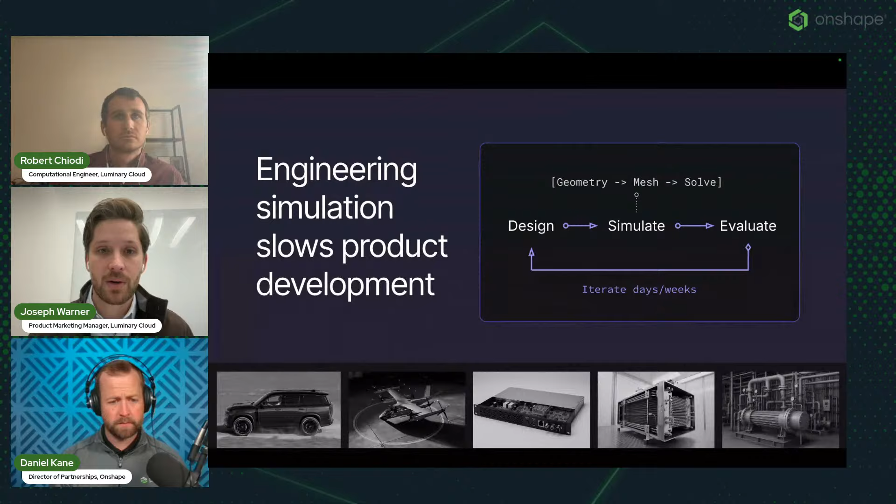What we're seeing across industries right now is that physics AI is actually reshaping this process. We can take a design, and with the physics AI model, we predict in seconds, or sometimes less than a second, the actual full simulation results with high accuracy. We'll get into the details a bit more, but the important thing here is that we actually can remove these manual, time-consuming steps. You don't need to do this typical computational meshing process, which is very manual and iterative and time-consuming. And then when you go to solve, you're not doing traditional numerical solving, which can take hours or longer—you're actually doing inference, so it's very quick, and then very repeatable and robust.

This opens up some really interesting use cases: things like rapid design iteration, which is particularly relevant for people who work in CAD tools, for example working in Onshape—you can actually do inference and very quickly get feedback on your design as you make changes. But of course, also design exploration—we can fire off a number of different inferences across various configurations and evaluate them all at the same time. And then optimization—actually wrapping this process in some sort of optimization algorithm and driving towards some best design automatically. And then finally, digital twins—how do you take these models and use them once the product has been deployed in the field, and use the inference to evaluate performance very quickly and cost-effectively. All of these things are traditionally possible with simulation, but they are really unlocked, and you're able to do them at much greater scale with physics AI.

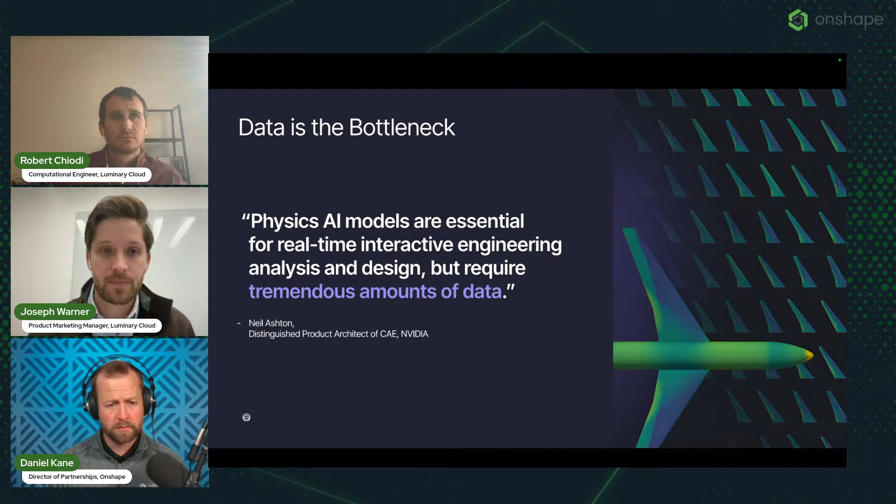What we've built is a unified physics AI platform, from data generation with our GPU native solver, to model training, and then actually deploying inference in your production environment, or you can use our APIs. But we also have access to our pre-trained shift models, and Rob's going to talk about that a bit more.

What these models allow you to do is actually bootstrap your process. You can take a model and fine tune it such that you don't need as much data yourself to get started and get high accuracy results, so that you can use it for engineering grade analysis and design.

And then finally, other data sources. You may have experimental data or test data that you want to bring in and train the model on, and help ground it in the actual reality that you've tested.

To dig into this a bit more, what we have here is what we call our physics AI factory. All of this exists within the Luminary platform, from data generation, geometries, meshing, and our GPU native solvers, which run simulations very quickly and cost effectively.

All this data is fully managed within the platform, along with our shift models. And then you're able to train models all within the platform with a very robust and extensive API SDK.

We also have an MCP server and an AI assistant, so you don't have to be an expert in our SDK to get started. I think Rob's going to talk about that a bit more.

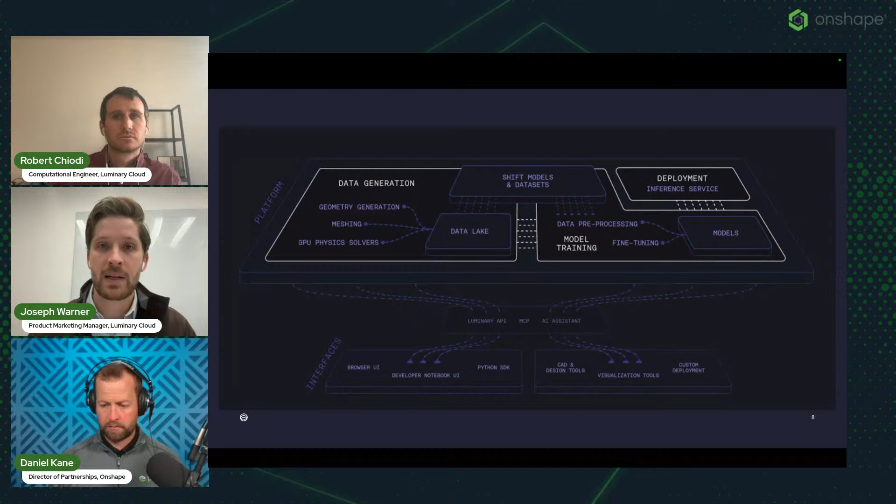You access all these things through our various interfaces, from our browser-based UI to our SDK and our in-app notebook as well. So we make it very accessible, but also extremely powerful, and it's all fully managed so you don't have to go and piece all these things together yourself, because we often hear that customers find it quite challenging to piece all these things together.

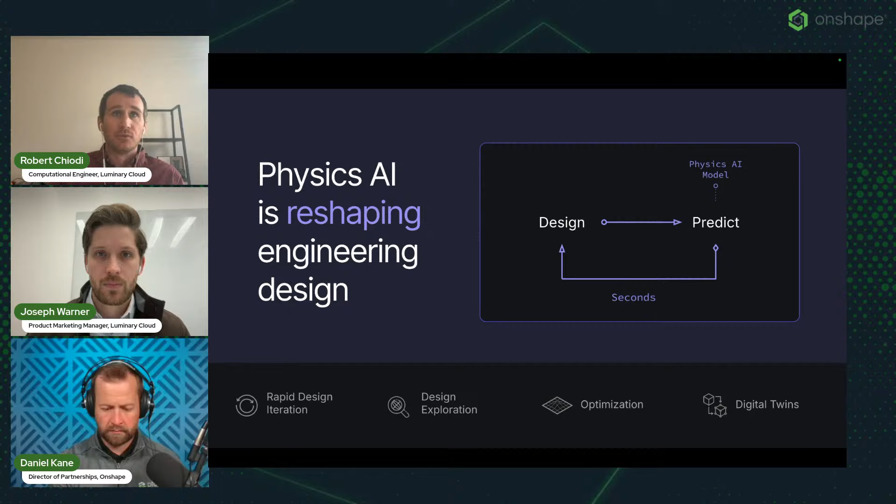This allows you to do things like rapid design iteration, which we'll show a little bit about today, design exploration through having parameterized CAD that Onshape enables, optimization, which we've done before but won't be talking about too much today, but really just enables all these workflows by having this tight coupling, which we built through this integration.

If they allow you to access this website, you're good to go basically from there. And also you ensure seamless, scalable, and accessible workflows. No matter where you are for your entire team, you can collaborate together, even if you live on different continents.

You can quickly share products. You don't need to worry about how to send this file over, zip it and put it in Dropbox or something. Instead, you can just send a link and we're already there. You can share with access controls, all those kinds of things that both Onshape and Luminary enable.

We also have robust and open APIs. This means that if what I showed today in our integration isn't exactly what you need from either the Onshape part or the Luminary part, both of us have very flexible and open APIs that you can use to customize this to your exact workflow and power what's going to help you and your company get your work done.

We also discussed rapid design exploration, made possible by the fact that Onshape is very good at robust CAD generation, especially if you make parameterized CAD through configurations or variable studios. This can, with the integration, be directly imported into Luminary and tracked with version history for design sweeps and optimization at scale. Again, this is made possible by the fact we're both in the cloud.

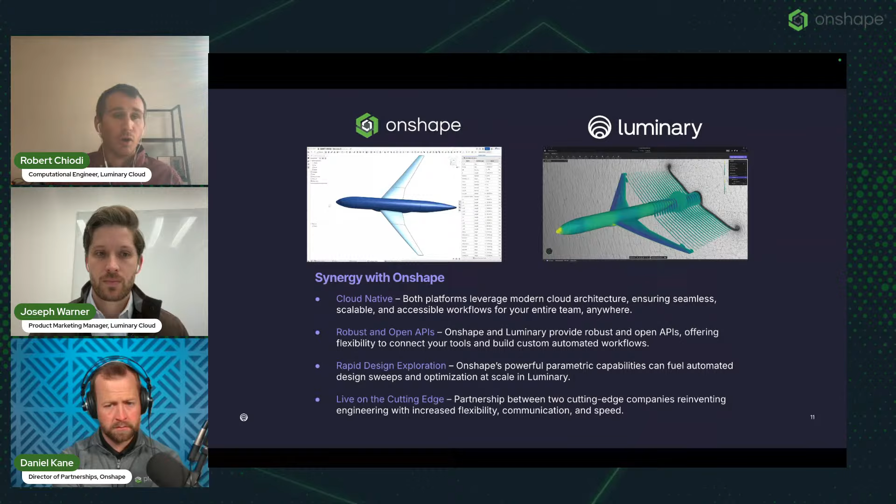Lastly, both of us just live on the cutting edge. So you can be confident that if you're working with Onshape and Luminary, you're going to be at the forefront of what's being done in both the CAD and simulation, CAE, physics AI worlds. You'll know that you'll be well taken care of and won't be falling behind against your competitors.

So now we're just going to show really quickly what the integration does, just the bare bones of it. There's a bit more to it as well, but we're just going to show the key functionalities.

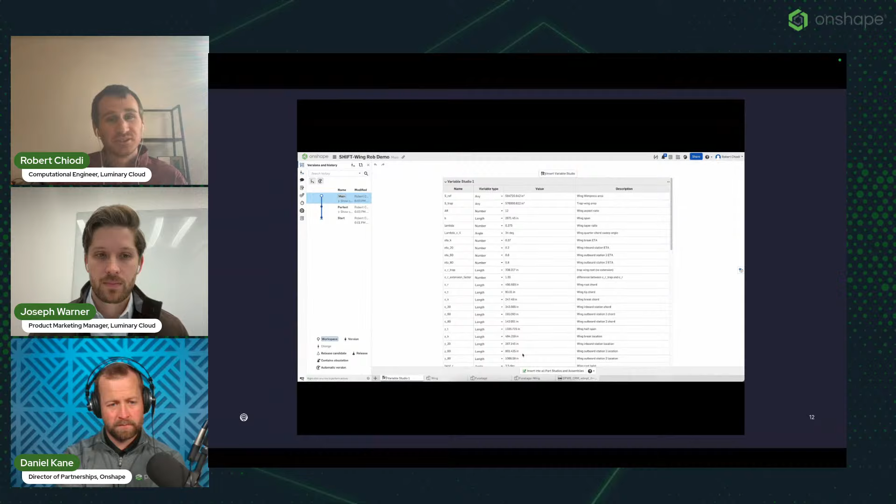Essentially here, we're starting from Onshape. This is the shift wing model that Joe mentioned, which we'll talk more about in a couple minutes. Essentially, it's a parameterized model with quite a few parameters in the variable studio, as you can see. They're actually controlling what the shape of the wings looks like, how they connect to the fuselage, and the shape of the fuselage itself.

Now we'll switch over to Luminary. All you need to do with this integration is go to your settings in Luminary, if you have an active Luminary account, and click Connect Account for Onshape. There we perform an OAuth workflow. We were already signed into Onshape, so that happened very quickly. Otherwise, you just sign into your account.

Now we're just going to start a project in Luminary to track the work we're going to be doing. Now we'll upload a file like you do normally, and you can see there's an Onshape button. What happens is we're pulling and showing all the documents you have in Onshape -- these are just the 8 most recent or so.

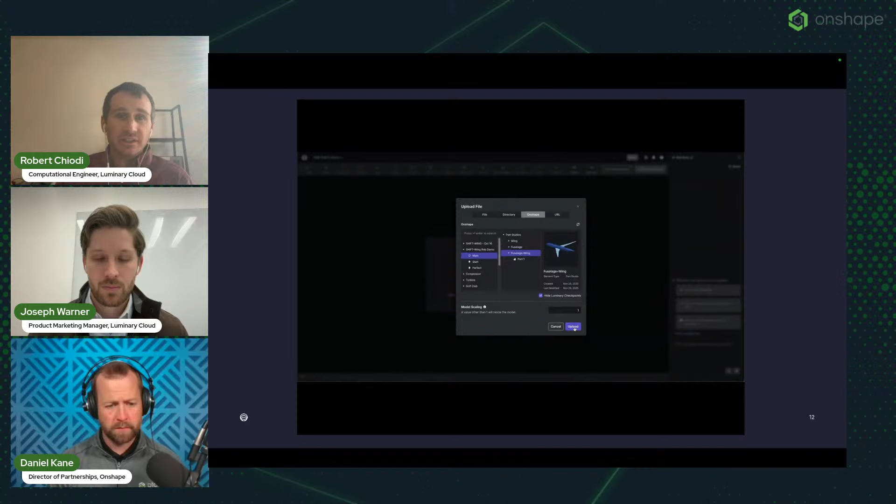We can actually view both versions and workspaces. So here we have the main workspace, our starting version as Onshape creates when you copy a workspace, and also one I called Perfect that I made up just to show that we can track these user versions. Inside each one, you saw we have part studios. We can also import assemblies as well, and also subsets of parts from those.

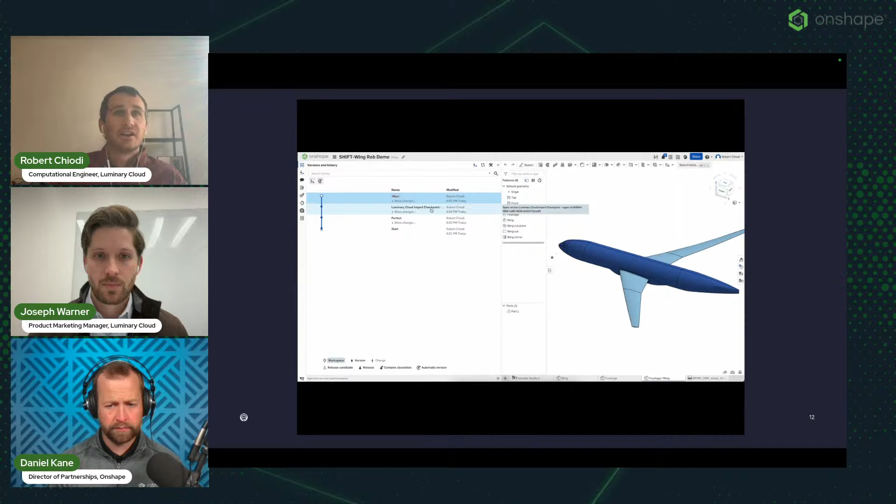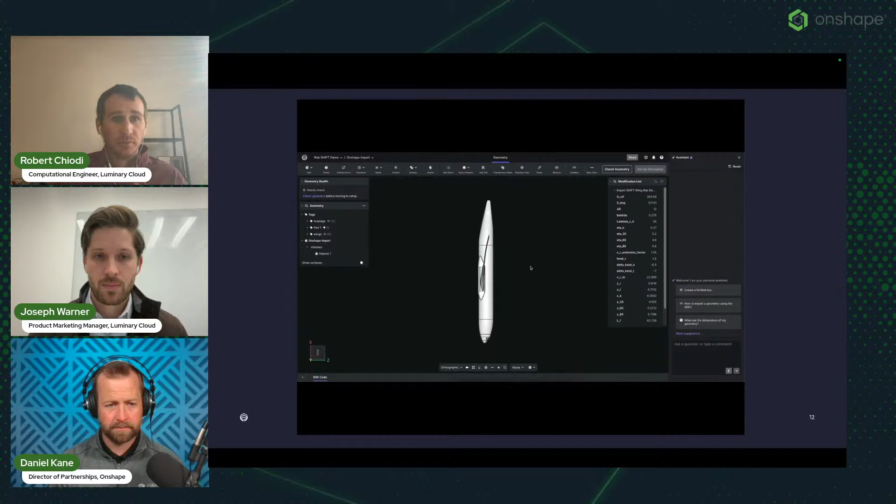When we perform this import, essentially what we do is make a new version, as you can see there. This lets you track in your history in Onshape what the state was when you imported it into Luminary. Then that's going to perform an export in Parasolid, just a technical detail, from Onshape into Luminary. This is all real time, by the way -- that's how quick that happened.

The really cool part is we're also pulling in that variable studio information I showed before. Even cooler, we actually maintain that connection between Onshape and Luminary. So you can now go ahead in Luminary and change, for instance, the aspect ratio, just because it's a really visual one that's easy to see. Click apply, and we'll go back to Onshape and make a change in that variable studio and re-import that changed geometry. This allows you, from inside Luminary, to leverage a lot of the really cool things about Onshape once you've set up something like parameterized CAD and maintain that robust connection between the two.

So you'll see we're performing that import just like we did before. After a few minutes, you'll see that we have a very strange looking plane, and that's because we just made a large change to the aspect ratio, so you can very easily see that we did actually import new geometry. So here we're just doing a couple light checks.

We have Luminary, and now you can see this new geometry. We never had to go back to Onshape to drive this feature. So if you have a CAD you want to explore that's parameterized, you can do a lot of that from Luminary and get that scalability and optimization loops we were talking about before.

If you have all those variables, we also have search functionality to help as well. Now we're going to do something a bit weird - we're going to make a branch from our import, just for reasons. We'll name it broken branch because we're going to purposely break the Onshape regeneration, to demonstrate how we keep that connection and how it has multiple benefits beyond just changing variables.

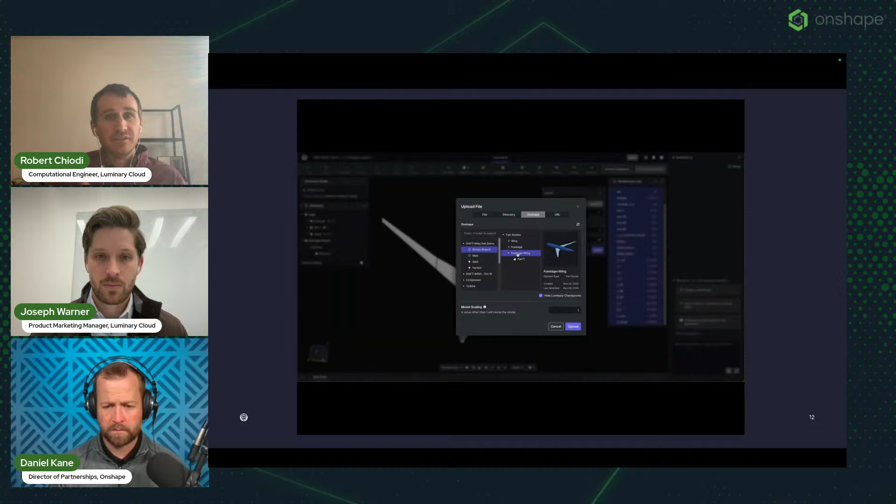So like I said, we're purposely going to break this. We'll generate two warnings in Onshape. We'll then swap files - this is going to import a different Onshape part studio because we're switching from the main workspace to the broken branch workspace we just created. You can see this document browser already updated because we're keeping that connection to Onshape.

And once again, it's all authenticated against your own account, so you're only seeing things you have access to, but if people share Onshape documents with you, you'll be able to see them in Luminary as well. So the key thing here is, as I said, we made that break in the regeneration, so we got some warnings in Onshape.

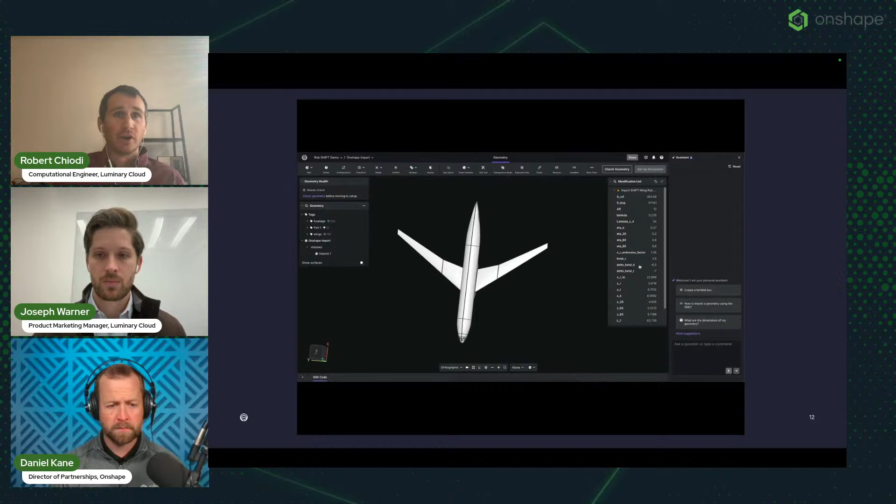What you'll see is we're doing this import. We did a branch from our originals, we're going to go back to our original aspect ratio of 12. The plane looks more normal, but the key thing here is we're actually propagating these errors forward into Luminary. So if you're making changes in Luminary and accidentally break the regeneration in Onshape, you'll be made aware of that - you won't just be importing ghost parts, because we'd miss the fact that we broke something in Onshape. This shows the connectivity we can build between both.

The last thing we're going to demonstrate is something central to Luminary's SDK and scaling ability, which is the ability to import metadata from CAD, which we refer to as tags. In Onshape, it's actually done by assigning face appearances, just because that's the way it comes through in Parasolid.

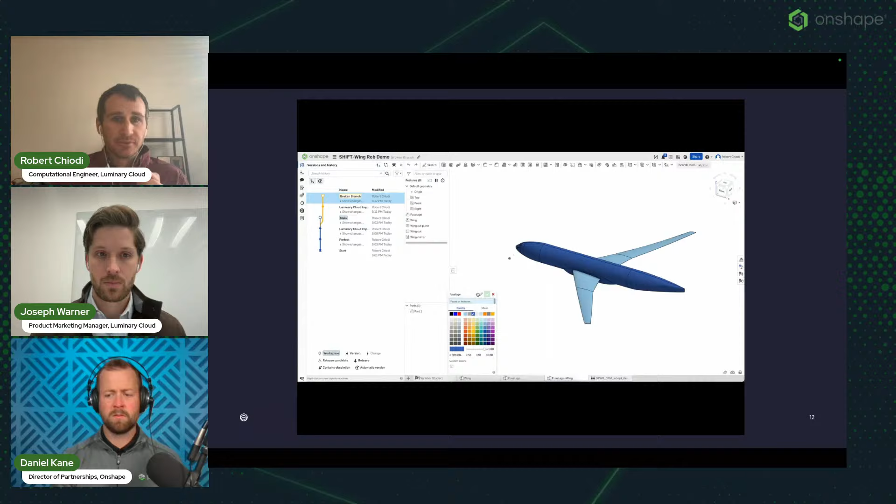So first we made a mistake in the recording and realized we need to go back because we don't want to have a broken state anymore. We'll take advantage of Onshape's very nice Control-Z capabilities to undo that. Then we basically modify this face appearance - you can see here we're renaming this from fuselage to right fuselage. There's nothing special about the name right fuselage; we've just renamed an appearance inside Onshape.

And the cool thing here is now we can sync. We have that workspace, we just changed that workspace's state - the broken branch workspace. And because we kept that connectivity, we can sync, which means we're going to take in the new status, the new state of that workspace.

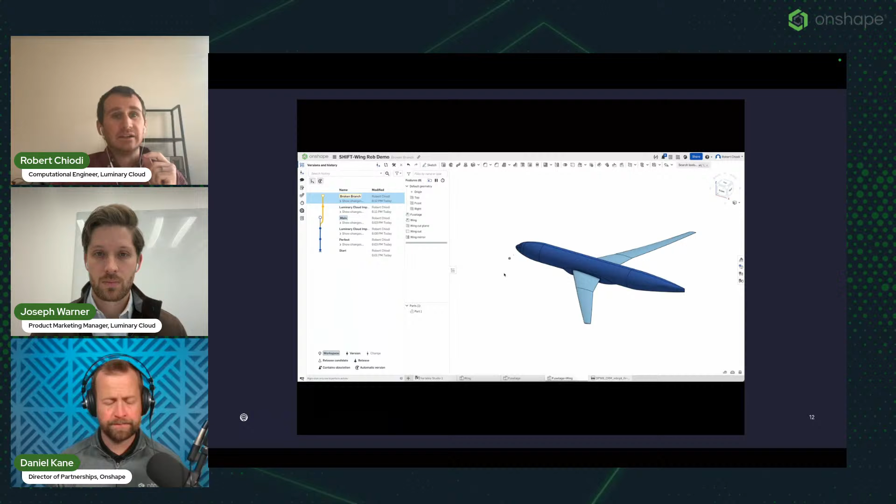So when this import happens, you're going to see two things. One, we'll have no warnings anymore in the top right because we fixed those in Onshape and synced with the current state of the branch. And two, we have this tag denoting the surfaces - we renamed it to right fuselage, you can see it's called right fuselage. We already had a wings tag, and that's uniquely identifying surfaces in that CAD, which allows us to script based on those unique surfaces, even if they change in the geometry.

So that's a bit of how the integration works, and it's actually quite powerful. What we just showed, because it's easier to demonstrate, is in the UI, but we have the exact same functionalities available through our SDK as well, which allows that flexibility and adaptation to whatever you need to maximize your workflow and get to maximal efficiency.

Now we're going to talk a little bit about the SHIFT-Wing model and use that as a baseline for what Physics AI can do for you, and how we can embed it inside your workflow, which we'll show in the next stage. Essentially, we used Onshape in partnership - they were very nice to partner with us and help us generate this data set. We have that SHIFT-Wing model I just showed.

We have all those variables in that variable studio, and we changed 7 of them. So aspect ratio, which I showed before in the imports, you can see here in the video on the right - we're actually changing these things as we're talking about them. And you can see there's actually quite substantial deformations as we move these parameters between the min and max range. These are modifications in the variable studio.

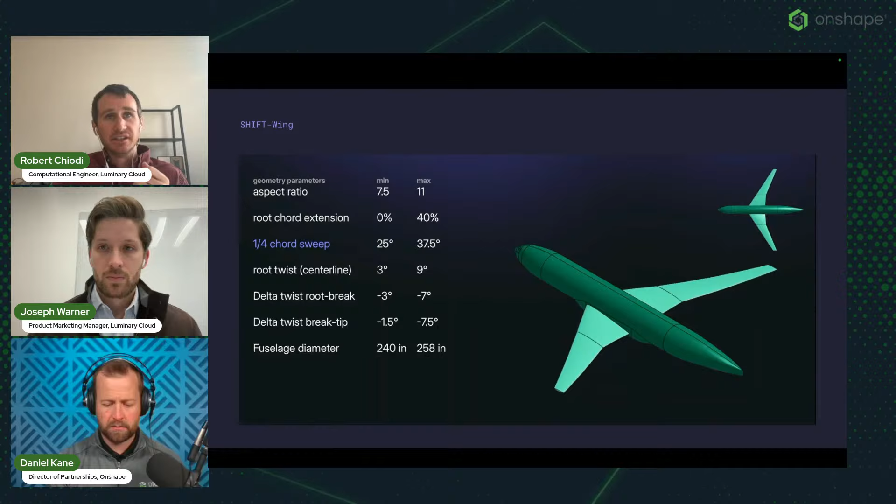You could also do such a thing with configurations and generate these unique geometries, but Onshape was very nice to partner with us to be able to do this. You can see we generated quite a bit of data, and there's quite a bit of change in the geometry here. The impressive thing is both Onshape and Luminary remained robust to these geometry changes, which allows us to actually generate a very large data set.

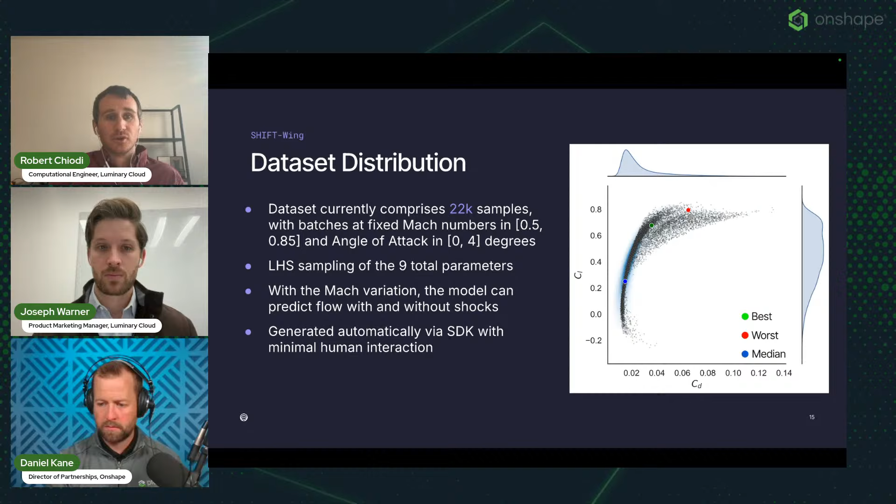By large, I mean we simulated 22,000 samples in about a month. So that means 22,000 unique simulations, many of which had unique geometries as well, and also changing Mach numbers from 0.5 to 0.85. The interesting thing there is we're transitioning from subsonic to transonic, so you get a bit different interesting physics there. And this was done all through the Luminary SDK and our integration to Onshape, with very minimal human interaction.

So the key thing here is, how can we generate this data? How can we remain robust? We showed a bit of the sweep of the parameters we changed in the geometry. The other very important thing is we need to have an independence from the geometry to actually perform accurate simulations.

In the typical simulation workflow, when you change that geometry, you're going to have to worry about how do I mesh this thing? How do I get a good simulation of this? How many cells do I need in the boundary layer? We at Luminary have really removed all those questions by having what we call Luminary Mesh Adaptation, LMA, which is a really, really fancy mesh adaptation highly specialized for these kinds of problems.

But the key thing here is the input to get an entire simulation that you can trust for accuracy is exactly one number, which is just the number of cells you want to have in your final simulation. In this case, for shift wing, 30 million. And that is the only input you need.

After that, you can be confident that we're going to resolve the geometry correctly that we're pulling in from Onshape, and that we're going to resolve the flow physics correctly, because we're going to exactly mesh and adapt to that solution for every single one of those 22,000 samples in that data set. This is what really lets you work at scale, because you don't need to worry about meshing this geometry, that geometry, for 20,000 samples, which really doesn't let you scale to the amount of data you need to take advantage of Physics AI.

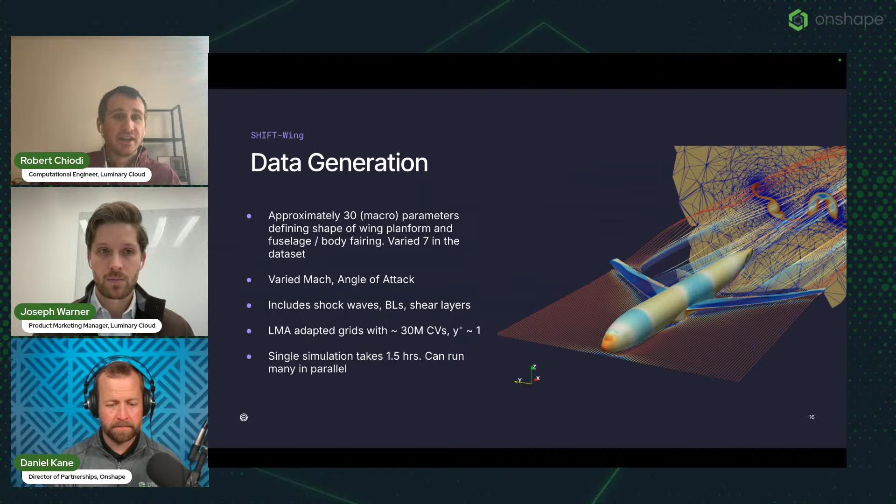So a single simulation in this case takes 1.5 hours. We're actually working on improving that speed. But the important thing here is, again, we're in the cloud, so you can actually run these in parallel. So you're not talking about 22,000 times 1.5 hours and taking years to do this. You can actually do it much, much, much more quickly.

As I said before, really the benefit there is Luminary's worked very hard to automate this inner loop. So how do we go from a geometry to a simulation we can trust without having to worry about tons of man hours, expertise, and carefully crafted experience over the years? That starts from importing geometries like this integration from Onshape, and then having some light features.

So you don't need to worry about polluting your Onshape CAD document with adding far fields, for instance, or symmetry walls or those kinds of things. We can handle those small things in Luminary itself. So you can actually just worry about making the CAD the model you care about, and then do those kind of CFD simulation specific things inside Luminary.

And then as Joe mentioned, we have all kinds of AI infused to both do physics AI, but also to help you set up these cases. So we have AI assistants in the UI. We have an embedded hosted notebook like Jupyter Notebooks actually on the Luminary website. And we also have an MCP if you have your own IDE you like to use, or you prefer using Claude Code or something like that, that you can connect and actually get information about Luminary and help drive those changes.

And then the couple of big things here about doing these training data sets at scale is that, as Joe mentioned again, we're fully GPU native solvers built from the ground up over years, and extremely specialized expertise from people we've hired that lets us really do these things extremely quickly, extremely accurately, with very limited user input and with very high robustness.

And that lets you kind of just set it and forget it in these flows. So if you're assigning those tags, like I mentioned before, where you can identify the wing, the fuselage, the far field, the same script's going to work for you over and over, and you can be confident those results are going to be quick and accurate.

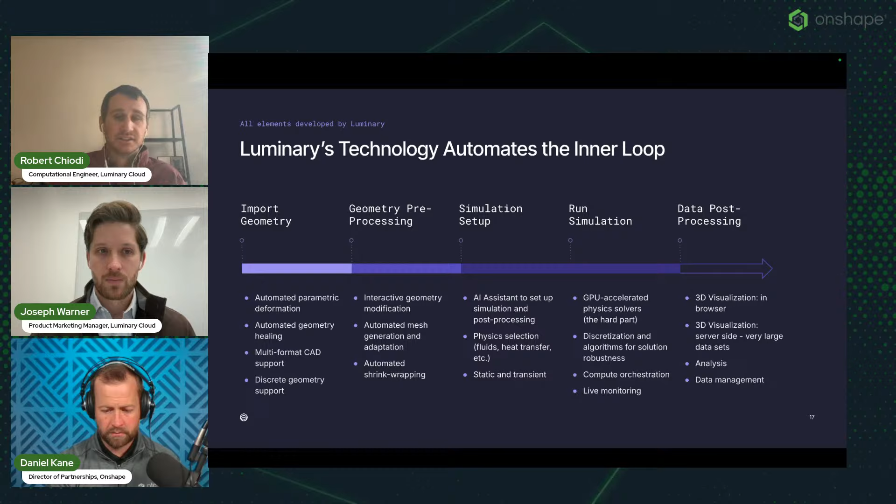And then we also have data processing. We have a native visualizer I'll actually show in a little bit, and all kinds of things you'd expect for both a cloud native platform as well as a simulation platform. And again, infused entirely with physics AI.

So just to quickly talk about whether it's worth doing these models, if you can actually trust these. We're comparing here to standard surrogate models. So basically, if you can predict lift and drag given those list of variable studio parameters, for instance, how do we do compared to that?

You can see Domino, which is the model we're using, is inherited from NVIDIA, but we've enhanced it quite a bit. It does quite well and actually outpredicts, with more accuracy, the lift and drag in this case than these scalar surrogate models. But Domino does two really cool things that make it way better than these surrogate models, even if it was just as accurate.

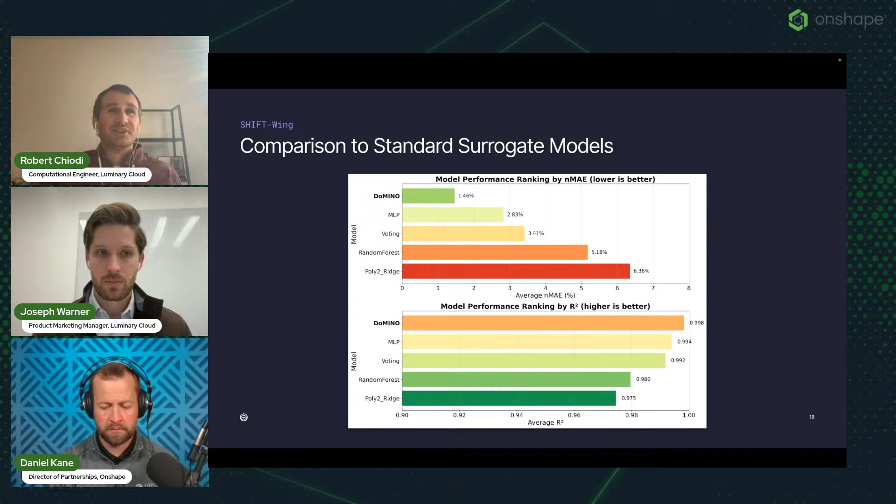And this is especially important if you have other considerations. Maybe you don't just care about lift and drag, but you want to post-process this into other things. This gets you actually a lot closer to a real replacement for simulation, beyond just getting a couple scalar numbers that you care about.

And the other cool thing here is if you're, for instance, the CFD guy at your company, but you have a whole mess of people that do thermal, that do loads, that do other parts of your engineering workflow, you can give them this full field. If I give them a full pressure field and someone wants to take it and compute a load, they can.

But instead of running the CFD analysis, which again took about an hour and a half, and that's extremely quick because of how much we focused on that, this physics AI prediction takes about 5 seconds. So you can even just give them the workflow themselves. They can click a button, get that result, and calculate the loads that they want.

The other really cool thing here is the only input for the geometry into Domino is the STL. So if you then throw away the parameterization you have and start making these things in all kinds of weird ways, as long as it looks a bit like the plane you were simulating before that's in your training data, you're good to go.

You don't need to worry about being shoehorned into this variable studio or the exact parameterization you chose before. If I wanted to add new parameters in variable studio and generate new geometry, that is completely fine. You're not going to break the model.

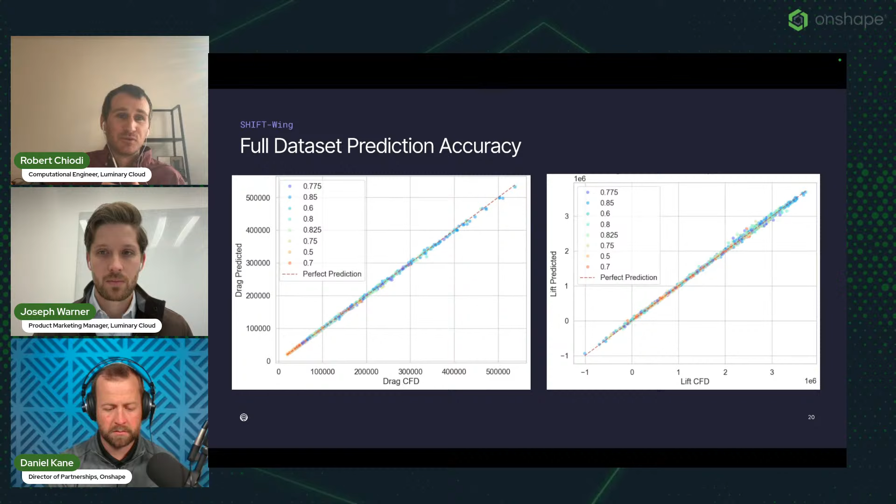We're not trying to use physics AI to match garbage. We did a lot of work matching what looks like a NASA CRM, looking at those physics, making sure they're accurate before we went ahead and actually trained this model. So you can trust these results you're getting.

And if you thought this looked good in any way, trust that everything else you're going to do inference on will look better. So just to quickly wrap up on the models aspect there, we also have other shift models. Today we talked about SHIFT-Wing, which is done again in partnership with Onshape. We also have SHIFT-SUV for if you're more interested in automotive and car.

And we're also focusing on rolling out many more of these models over the next year.

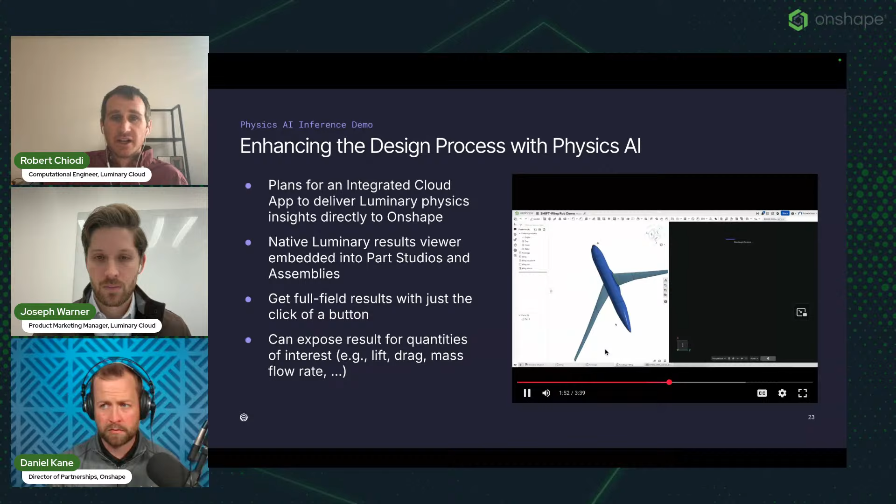The really cool thing here is we can go into the instance of variable studio again. We can change the aspect ratio just to make it obvious again. You'll see that if we skip forward a little bit, we'll have the regeneration as you'd expect in Onshape. We're also actively performing the inference as Onshape's doing that regeneration, so again we immediately get the physics results for that exact thing we're looking at in the Part Studio.

Just the last thing I want to mention, so you can zoom in and look at things, you can match the view over there. This is not, again, related in any way to the actual parameters that are set up in that variable studio.

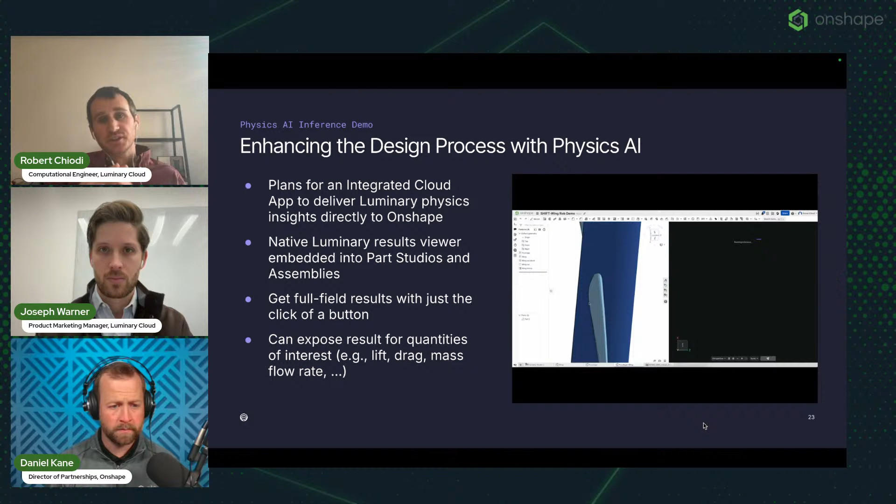So we can go into the fuselage as we do here, and we can make a change, for instance, to the fillet. We're making a discrete change, not related at all to those parameters we had before. This is going to lead to a regeneration that actually effectively removes it. You can see here on the bottom, the junction between the wings and the fuselage is kind of removed because we did that discrete change to the fuselage feature. But again, we pick that up and the inference works.

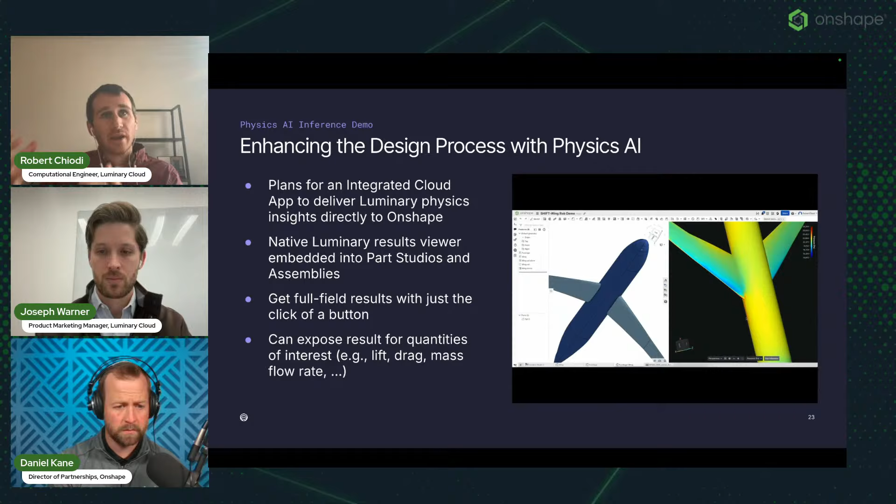That's because we're not tied to input parameters like scalar surrogate models usually are. We are looking at the actual geometry embedded into a latent space for that STL.

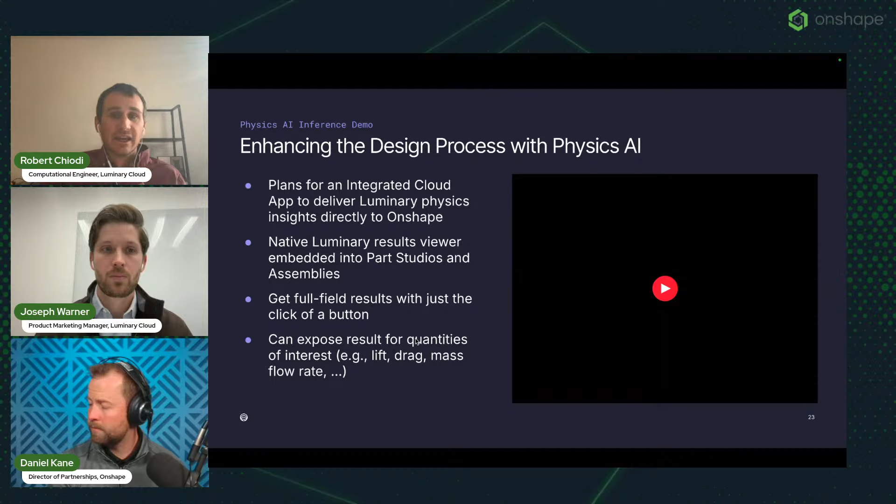Just then, lastly, I mentioned this is not a scalar surrogate, we don't just give you lift and drag, but I should also mention we can still give you lift and drag. We do understand that scalar quantities of interest like mass flow rate, lift, drag, and other kinds of things are important, and we can still expose those as well as this full field information that you can use to drive your engineering workflow. Instead of performing a simulation, even if it is fully automated in about an hour, you can get physics inference results in about 5 or 6 seconds.